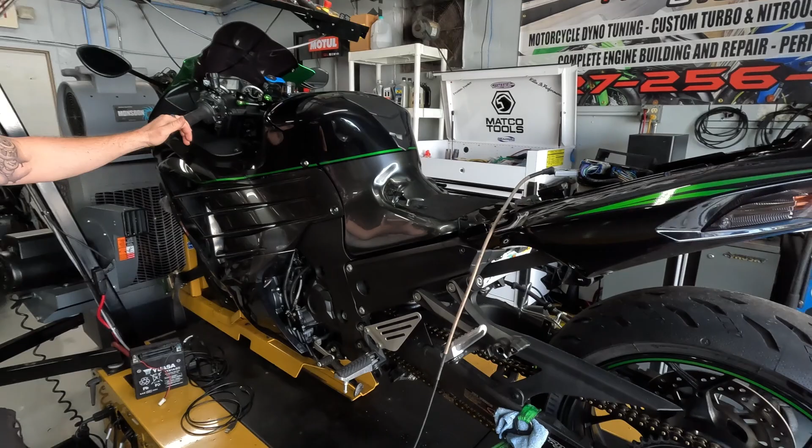This particular ZX14r, it is stretched roughly about 8 inches over from stock. He's still sitting on a 530 chain and sprocket kit. However, this is a Vortex steel sprocket and a steel front. He's on an EK ZVX3 chain. It's a 530 chain, it's just a better O-ring. I think these are the QX rings, if I'm not mistaken, on these. They're a little bit better, less resistance, so in theory it should make a little bit more power.

He's also got a Sprint P08 air filter on this, which is like the street version of Sprint's air filters. And he's got a full M4 stainless GP system. I haven't dynoed one, admittedly, with the full M4 system yet. So I'm very curious to see what kind of power this thing's gonna produce. I love my 14s, so we're gonna see what this thing does.

He's also on a Healtech quick shifter. So if anything, what we might do today with a little bit of extra time, we'll probably help dial that in just in case and get it a little bit snappier if it's not there already. I love these quick shifters. Typically with these though, it's not as easy as plug and play.

You can plug them in, get it all situated and go ride, but more than likely you're gonna have some little issues with it, like some misshifts and things like that. It might kind of shift when you're not meaning to shift. It might have an issue where you go to barely touch it and it tries to buck a little bit. They do need to get calibrated, but man, once they're calibrated in, these are one of my favorite quick shifters. They're pretty on point with their shift and their kill times and everything.

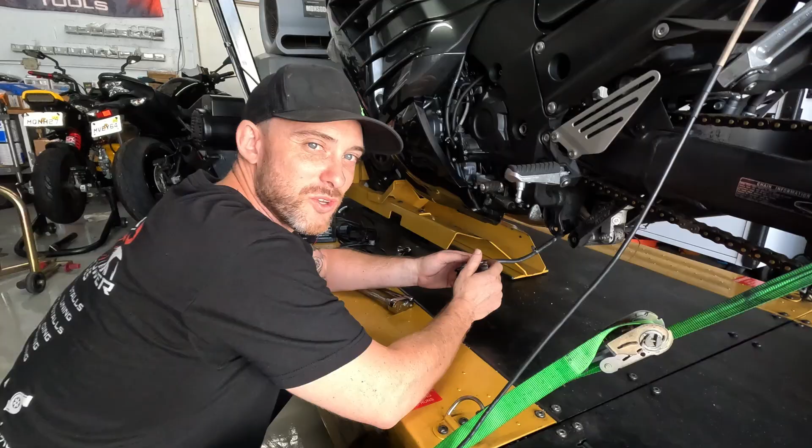So right now, this is the sniffer, or the wideband gauge. This is actually what gives us our air fuel ratio on the dyno. This is the reader right here. This is the sensor. No tuner could do their job without this sensor right here. This is the vital sensor. Again, this is our reference point.

So every time we make a change in the ECU or a Power Commander or your full standalone, whatever you're utilizing, anytime we make a change in that system, this is giving us the readout to see what those changes did. And every time we re-reference the lines, the AFRs, we make changes again, retest, and this is the sensor that's telling us how we're doing and what the mixture is looking like inside the engine.

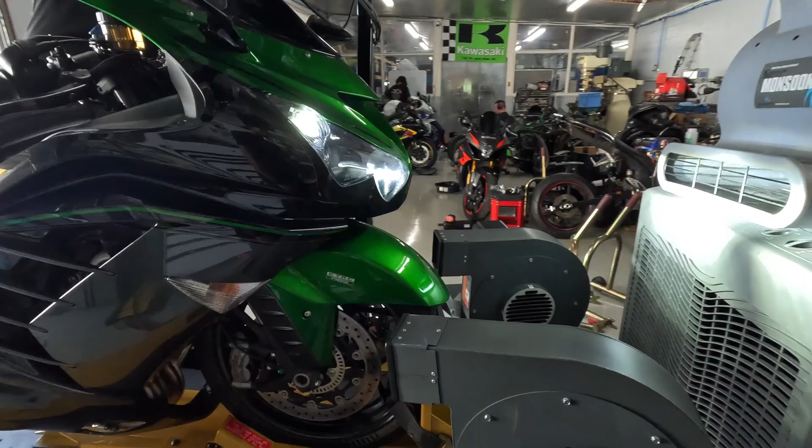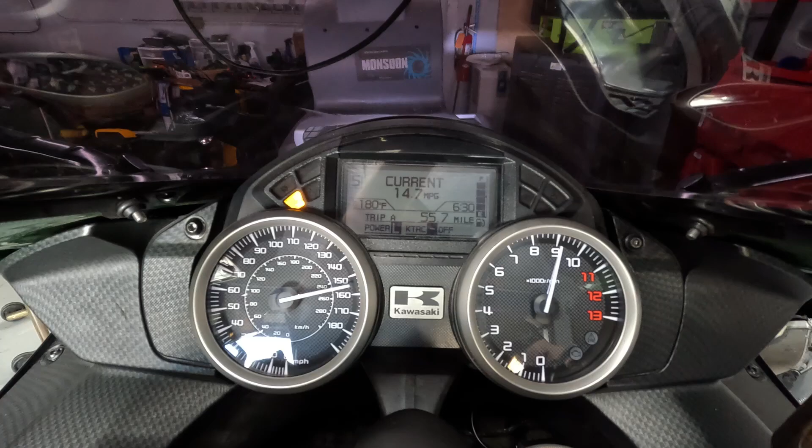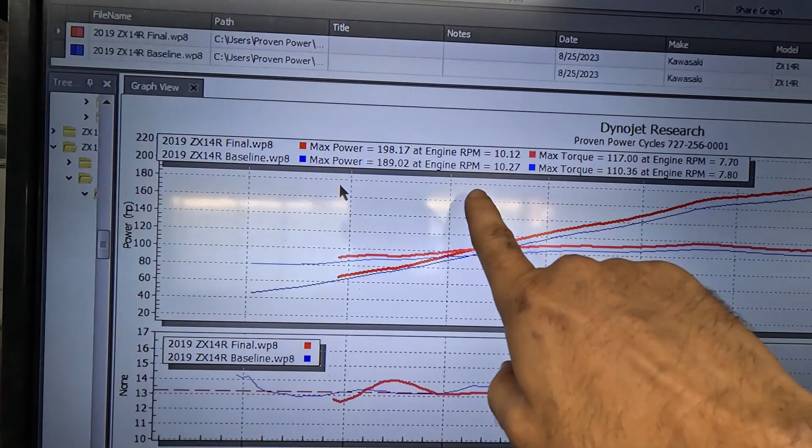We got this thing knocked out. It did exactly what we were hoping to do. It made 198 wheel horsepower with 117 foot-pounds of torque, and it came in with 189 wheel horsepower with 110 foot-pounds of torque. So again, it did exactly what we were hoping it was gonna do. Nice pull all the way to red line.

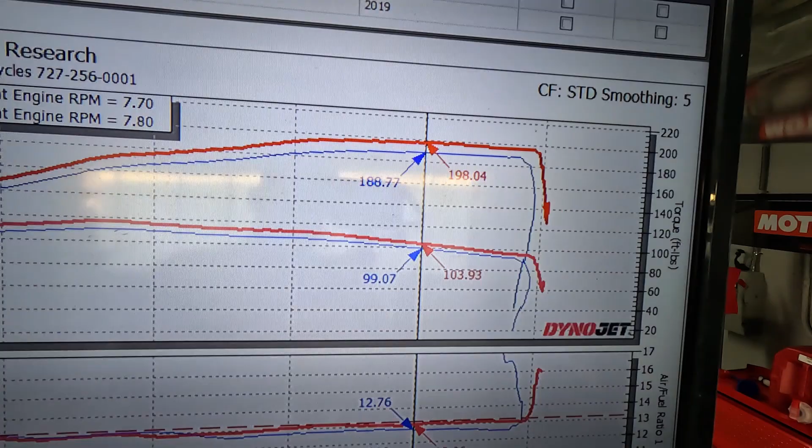We bumped up his rev limiter just a smidge. Again, I don't like to do those things unless you have the upgraded valve springs. Here's the stab. It was a pretty violent stab, so we have a little rich to lean little mix right here on the low RPM. But as soon as we hit 5K, smooths out just like butter. We ran it a little fat up top. Typically, I like to do that anyway.

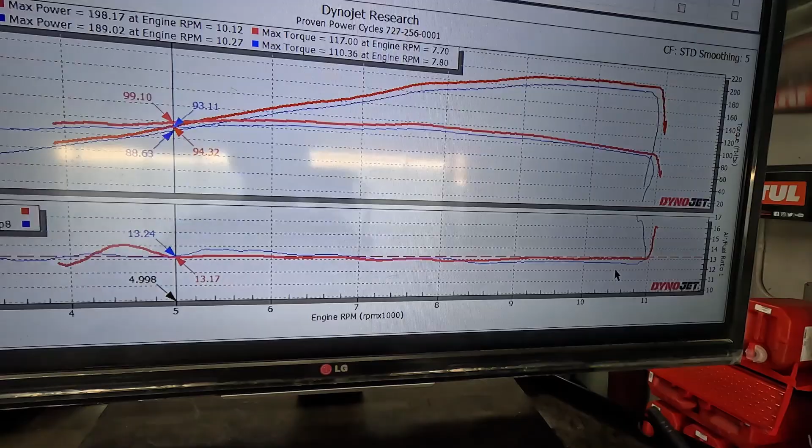It does tend to lean out just a couple of points on the street with the ram air, and again with the heat, humidity, when that's changing, it is going to be a little bit hotter, a little bit more humid. I will say this, lately the humidity has dropped off substantially in the last few days here, so I'm very happy with these numbers. I was hoping for these numbers. I wasn't expecting these numbers.

So I am glad. Again, the humidity did drop off. It was like in the 60s and 70s as far as the humidity goes. We were around 66 to about 70% humidity lately. Today we're around 45 to about 55% humidity. It kind of varied throughout the day. So very happy again with these numbers. It's exactly where I wanted it to be.

I'm very happy that the M4, I do like M4 in general. I am a fan of their product. I do feel like it's one of the best bang for your buck exhaust systems out there. And he also, again, has the Sprint filter and the aftermarket chain. So that kind of helps over the stock.

But again, he is stretched out about 8 inches over stock. So that is going to take away power no matter what bike you're on. If you have a stretched bike, it's going to take away a little bit of power versus a stock wheelbase bike. The further out you go, the more power you're going to lose on your dyno. So again, like some of you guys who are pretty far out, let's say 12, 14 inches over stock, expect that number to drop substantially the further out you go.